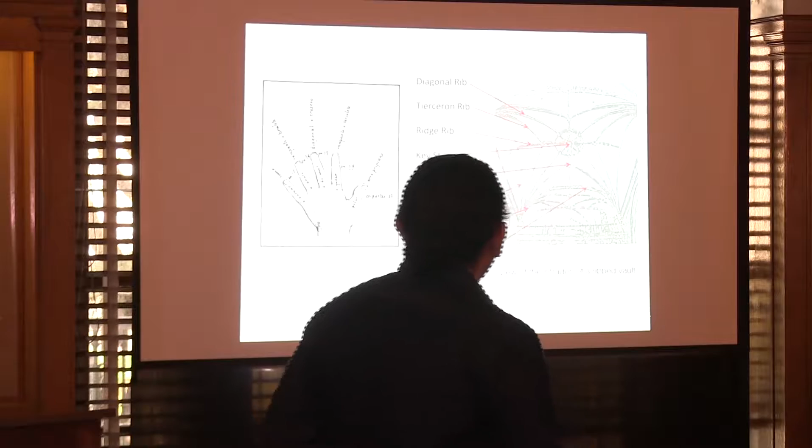Former arches are supported by walls, and transversal arches cross perpendicularly across the nave, similar to what these trusses are doing up here. Then the tas-de-charge is the spring point where all the ribs emerge together.

It's a really beautiful illustration of a hand, showing how each finger belongs to each of these ribs. The perpiaños, or transversal arches, need to be a little thicker because they support a couple of vaults. The middle finger is the diagonal, also a bit thicker. The little finger is the former arch, which doesn't have to be as thick because it's supported by walls—structurally, they each have meaning.

Looking back at 16th century manuscripts, we see that master builders had a method for how they designed these buildings. In this drawing by Hernán Ruiz, a document located at the Polytechnic University of Madrid, we see they had a system to identify the main elements within the rib vaults and then design and build them within those cathedrals or other buildings.

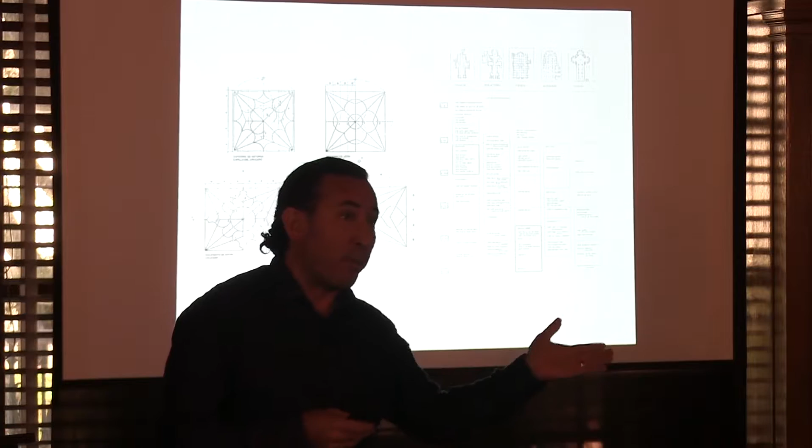More contemporary studies have shown that there are different types of patterns across different structures in Europe, and how they can be identified as different schools of thought, different schools of construction methods. So, based on all this...

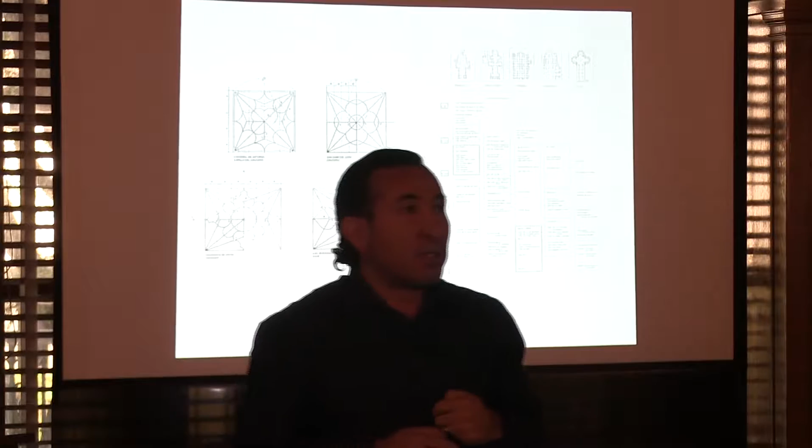...foundational knowledge, we went and did the 3D scanning. The first thing we needed to do was identify the buildings and the elements we wanted to work with in the interior of the churches, and use this scanner shown here.

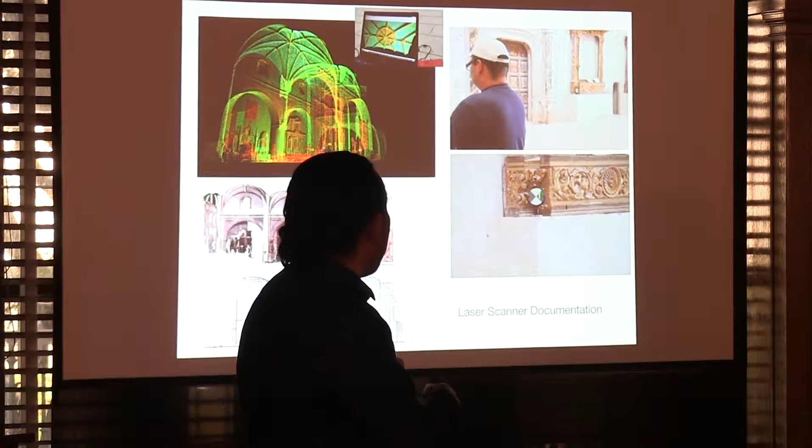You see the scanner laser ray reading the targets over here, and in a couple of days per church, we collected all the information necessary.

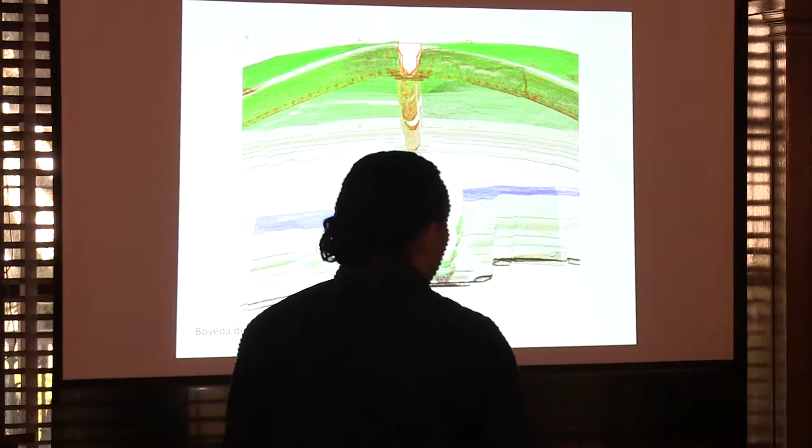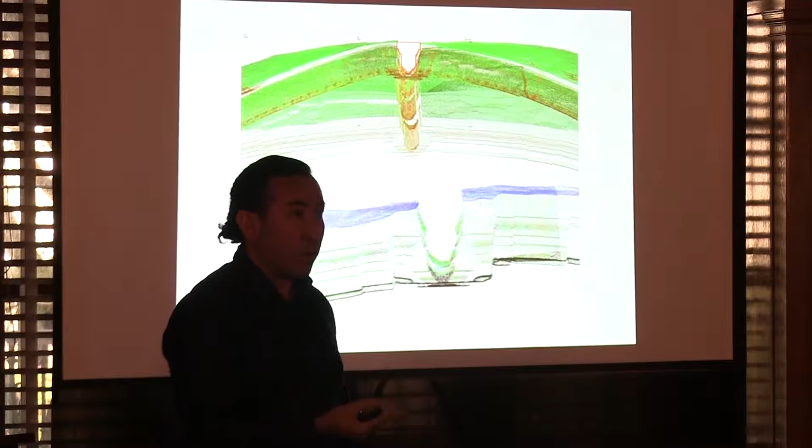And what can we do with that point cloud information? Well, we can do different things—as I mentioned before, you can do visualization, but also cut through the point cloud, zoom in, and reach areas of the building that would otherwise be very difficult to reach without major scaffolding. This gives a graphic type of information useful for analysis.

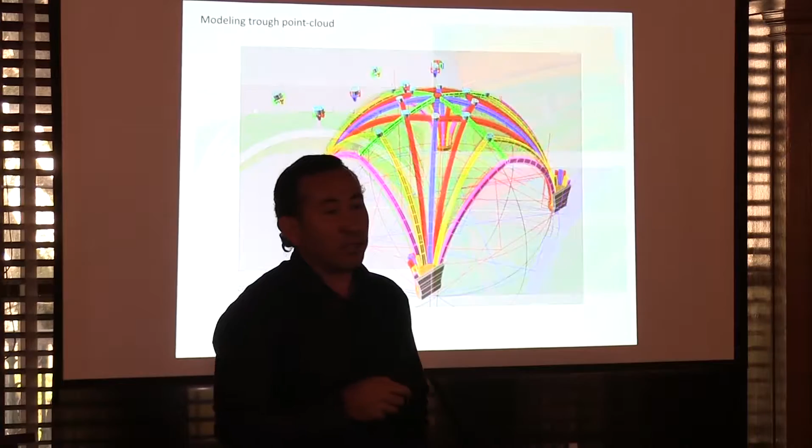So the work that we embraced was on the three-dimensional and two-dimensional features of these point clouds, making sections through them, cutting through them, looking at them from different perspectives, using different types of software, so we could recreate and understand the main design principles and constructive principles that drove these structures. So these are the type of images that we will be looking at.

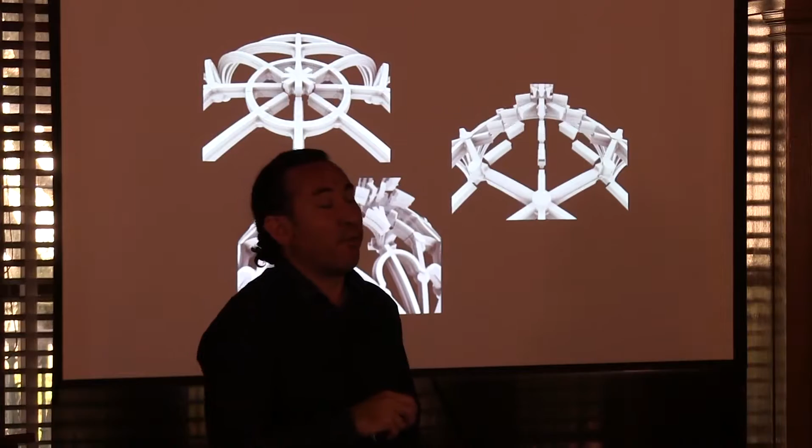We were really aware that what we were dealing with was, and I say we because I've always worked with students on this project, a set of rib vaults following the same building methods as those used in the Gothic period in Europe. It was a technology that was imported or exported from Europe to the Americas, especially to Mexico, and they had to follow specific rules, specific design parameters, specific constraints. So they work structurally, but also they form the space that they are required to form.

So what are those constraints? What are those design rules that were applied here? Within all this process, we used different types of visualization methods. For instance, what we are seeing in this photograph is what is usually called a rendering farm.

It took over the entire computer lab for an entire week during the summer, using the computers at their maximum capacity in order to create short clips so you could see those animations that I just showed you, engaging this process of modeling and visualizing and editing and so forth.

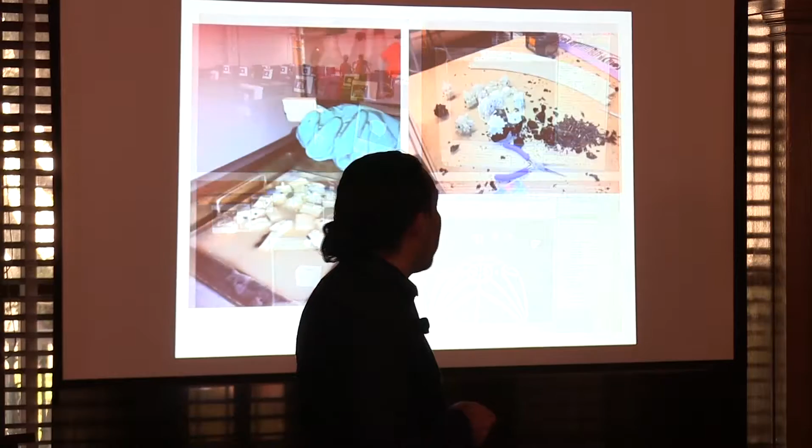Parallel to this process, we also thought, well, why don't we start also using 3D printers? How can 3D printing help us understand these structures better, but also explain them in such a way that people who are not experts can understand the characteristics of the buildings and why they are significant?

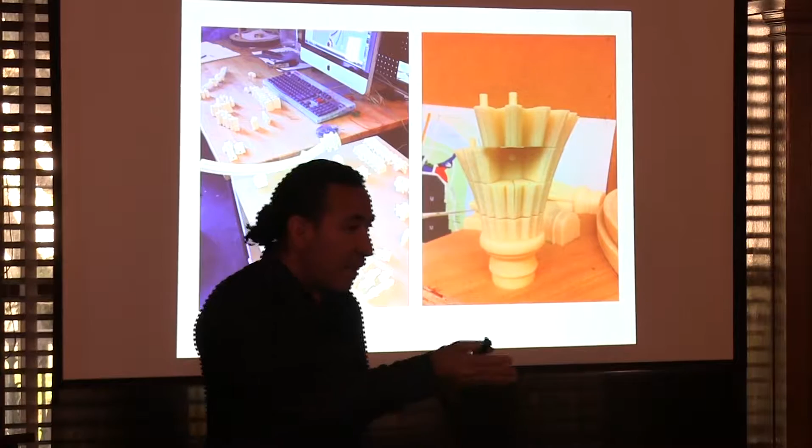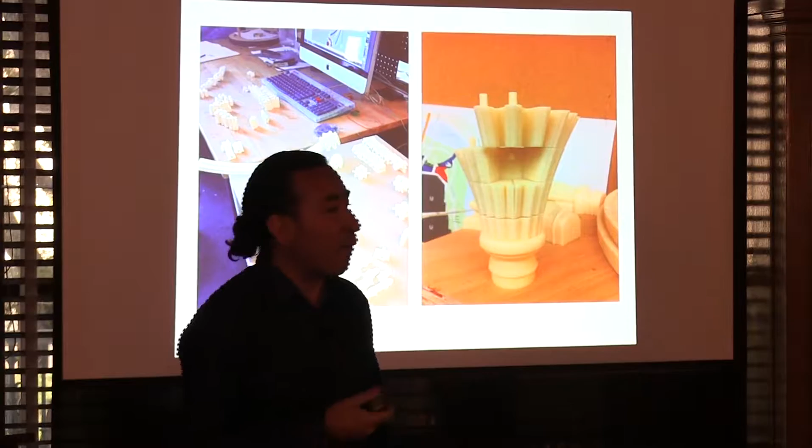The idea is that 3D printing is just like printing a paper, you hit print and the thing comes out, but it's actually a very meticulous, laborious process that involves a lot of work, a lot of trial and error, and then the assembly of these models. These are large models that also require some work.

So those are the different types of work that we embraced, or the goals that we had. I have to confess that making these 3D models with 3D printers wasn't originally the plan. The animations weren't either, but as we were developing the work, we saw the potential of this type of visualization system, and we took advantage of them and developed them.

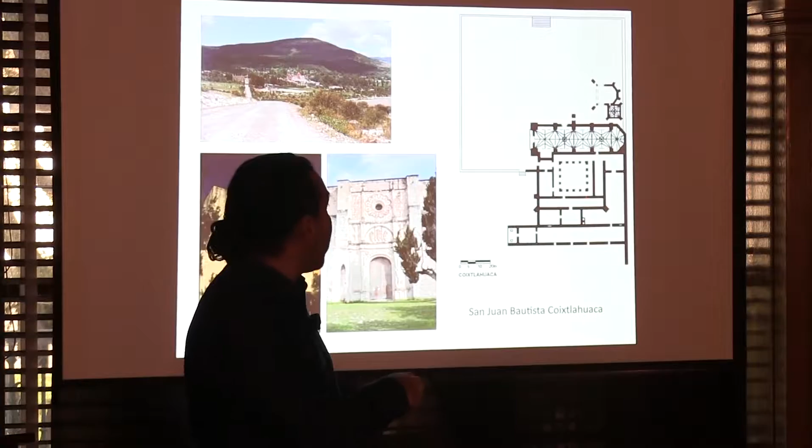In terms of the research findings, looking at the buildings, we find similarities and we find differences. For instance, here in San Juan Bautista, Coixtlahuaca, we see the configuration of the monastery with the large church.

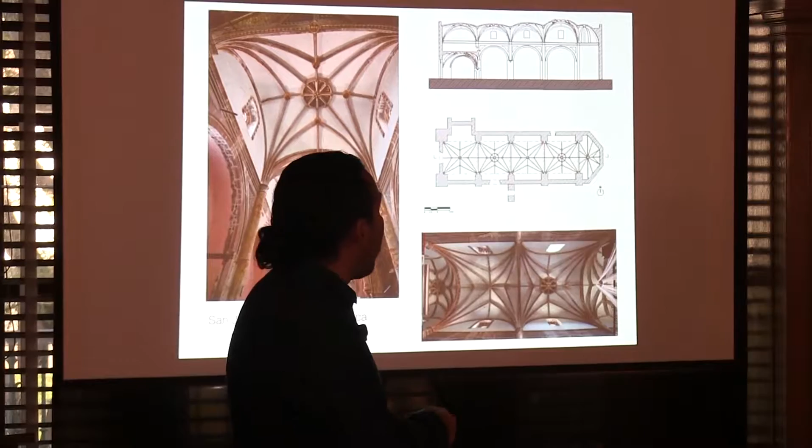This large church, as I mentioned, has excellent ribbed vaults that follow a square plan and so forth. But what matters here, and this is the type of discussion that specialists engage in, is: okay, how were they designed? And what we learned here is that by looking at the point cloud, having a very clear orthographic projection, seeing them purely in plan, we can recreate what were the geometric steps or constructions necessary to identify the layout of the ribs in plan.

For instance, here we see that the very first step, after drawing the diagonals and the ridge ribs, was to draw a triangle within that square, and that defines the path of those tierceron ribs. This operation is repeated four times, one per side of the square.

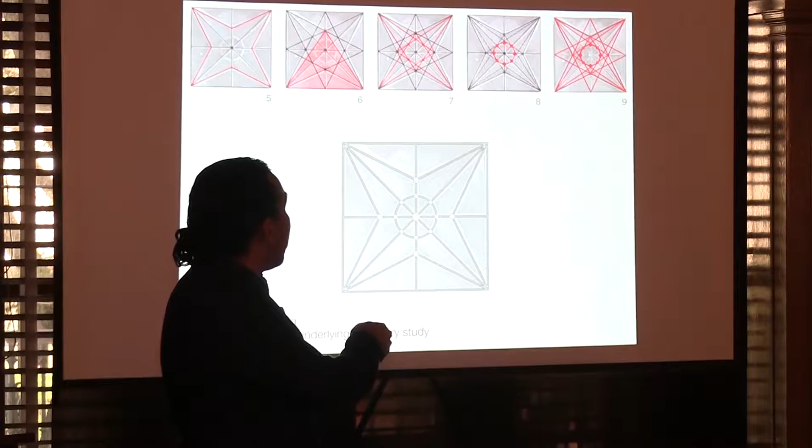And then the last question remaining is: where do we find the diameter, the center, the radius for this circle right at the center? So the next step will be to draw another triangle connecting the boss that connects the two tiercerons, and using one of the sides of the square as a base, and that will identify the point where you can see the radius of this internal circle, therefore having the entire drawing of the vault completed.

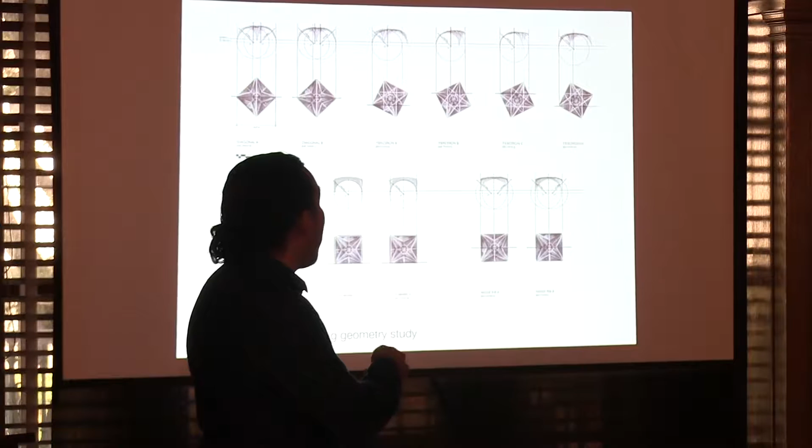This needs to be translated into the three-dimensional spectrum, it needs to be translated into elevation. Then, learning from cutting through this point cloud, we could recreate and figure out the radii that were used for each one of the arches, and come to interesting conclusions.

For instance, in this case, the vault -- there are two schools of thought. One of them is that the vault is a preconceived shape that the master builder tries to achieve. First, he says, okay, this is my shape.

At this period of time it would usually be a sphere, and you'd figure out how to draw all these ribs to achieve this spherical surface in space, forming the vault. The other approach, which is more ancient and comes from the Gothic period, says we are going to draw every single rib individually, and the overall shape of the vault is just a consequence. The overall geometry is pretty much a result of how each one of those ribs was drawn.

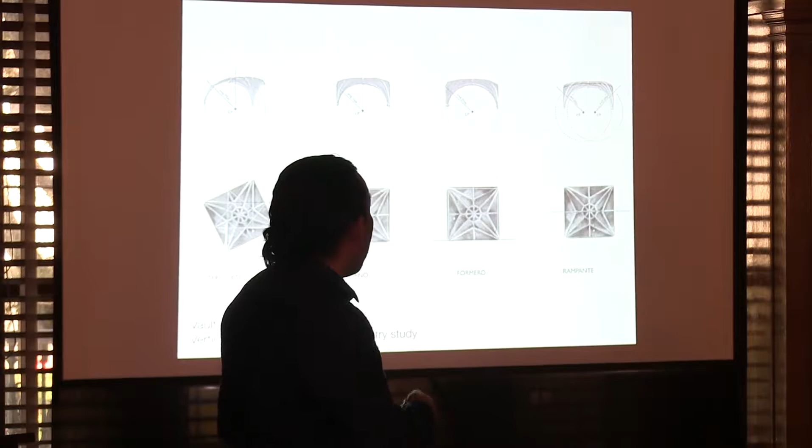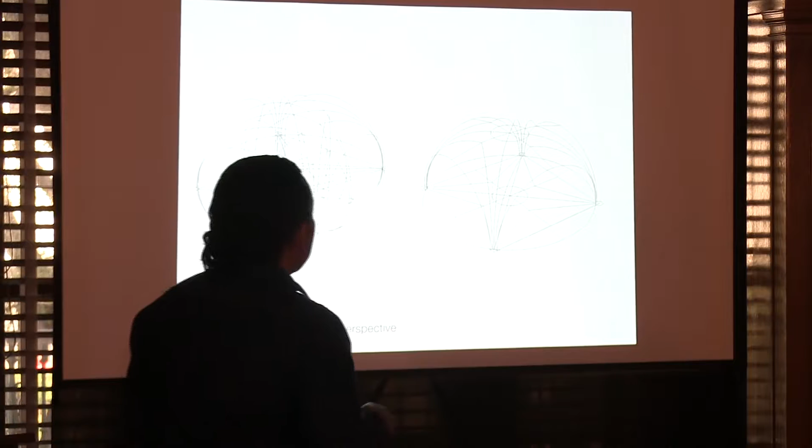Turns out that this vault follows this Gothic mode of thinking. Each one of these ribs does not respond to an overall geometry, but to a very individual set of operations that, at the end, form this vault with a very flat center within that configuration. So these are other types of visualization where we see the point cloud compared with these lines.

This is in figuring out if the actual hypothesis of these principles of design is correct. And then all of those are pretty much tested, being able to actually reproduce what we would call orthographic projections, understand how this was actually built in space, and be able to visualize this vault from the constructive perspective.

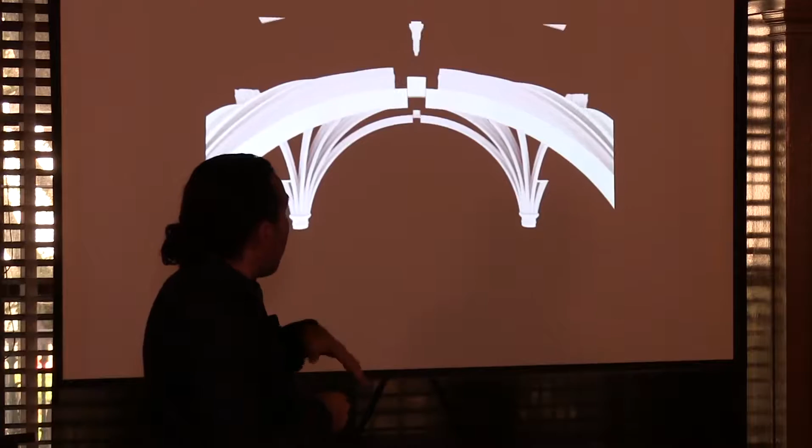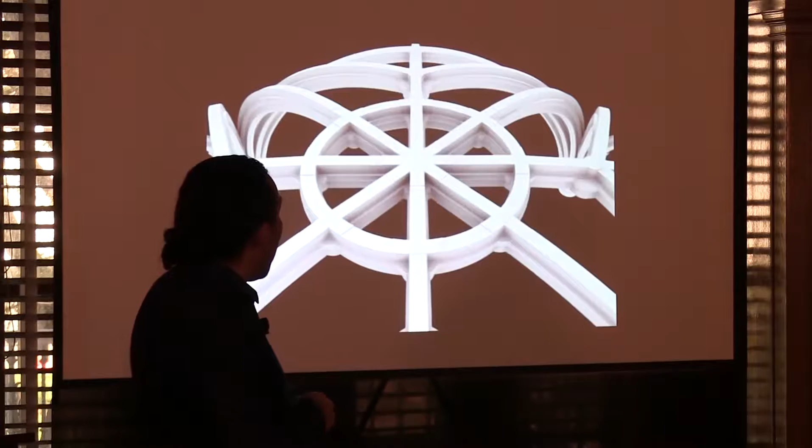So we are seeing how individual pieces form these arches, and how these arches form the vault itself, and how, as I mentioned, you are going to see the pieces right at the center forming a pretty much horizontal ring. And then the keystone comes in, and we understand also the stability principles of force for this type of structure.

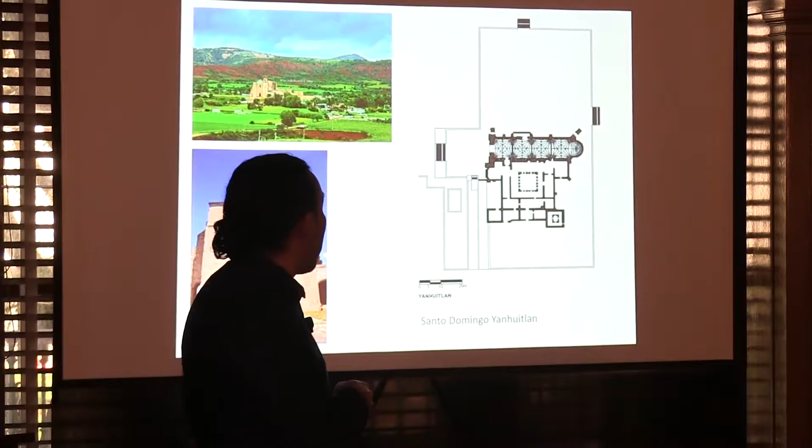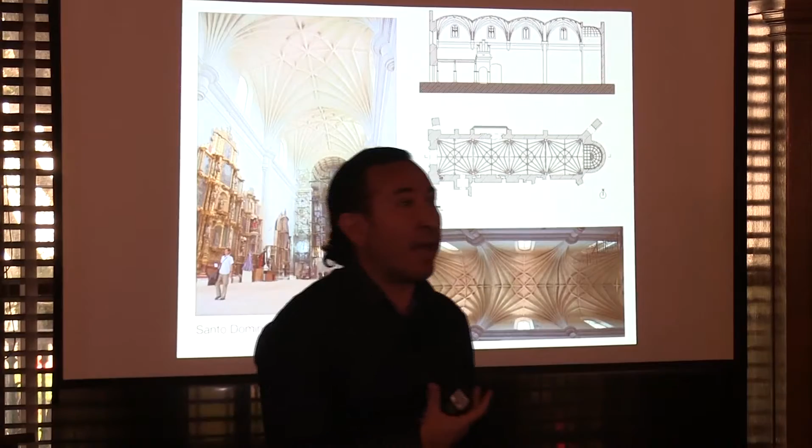The second one is Yanhuitlan, the Church of Yanhuitlan, the tallest building, 16th century, with really tall vaults. We see that again, four vaults on a square plan that follow exactly the same design. So taking one as the model, we start to understand how they were designed in plan, starting with an equilateral triangle.

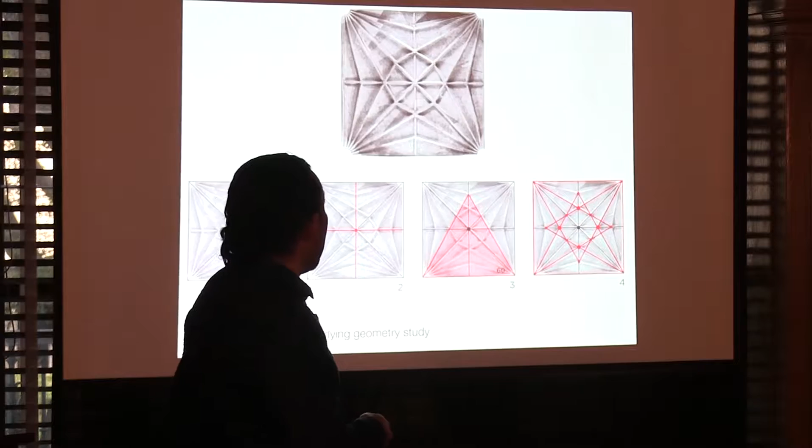Something that identifies this vault, unique to this set of vaults, is that they have two tiercerons. So they have the diagonal ribs, but also two tiercerons, which is not common, especially comparing this type of vault with other vaults of similar span and square plan shape. Nevertheless, the designer decided to use double tiercerons, so the task is to identify where those initial operations in plan were performed, how they were done, and the sequence of steps the designer had to follow to give form in plan to this vault.

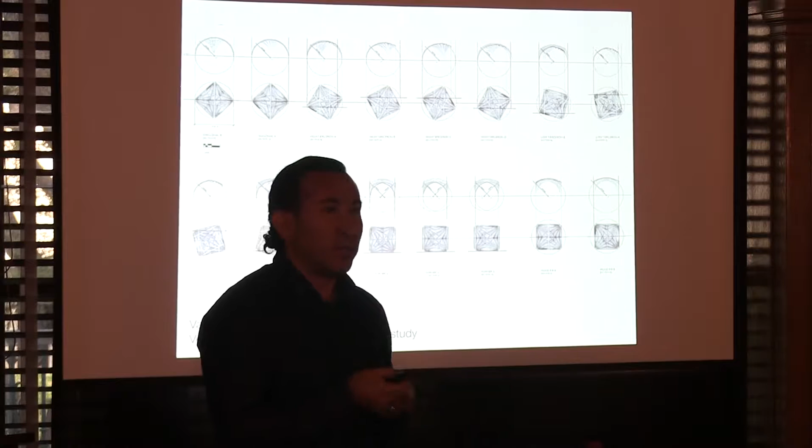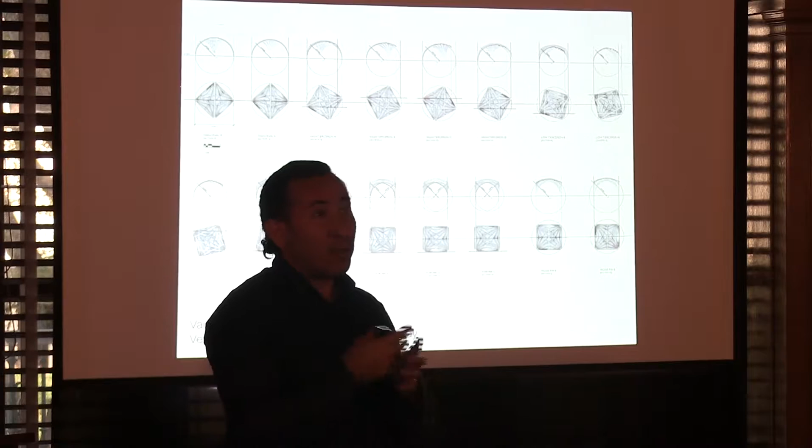The second one will be very similar, using the point cloud, starting by looking at each one of those arches. They have distortions and deformations. What we are facing right now in class—I teach a class on building documentation—is this contrast between what was made, which is very handcrafted. It's actually indigenous people who had never built this before, crafting these vaults, so of course they are not perfect.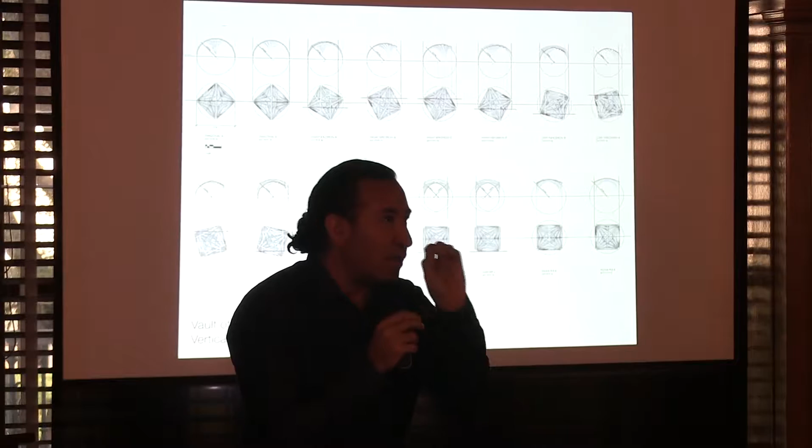And then using digital tools that require this excessive amount of precision—everything to the millimeter, to the 32nd of an inch—we try to negotiate with these tolerances, with these imperfections, if you want to call them that. So there is some sense of how these were designed.

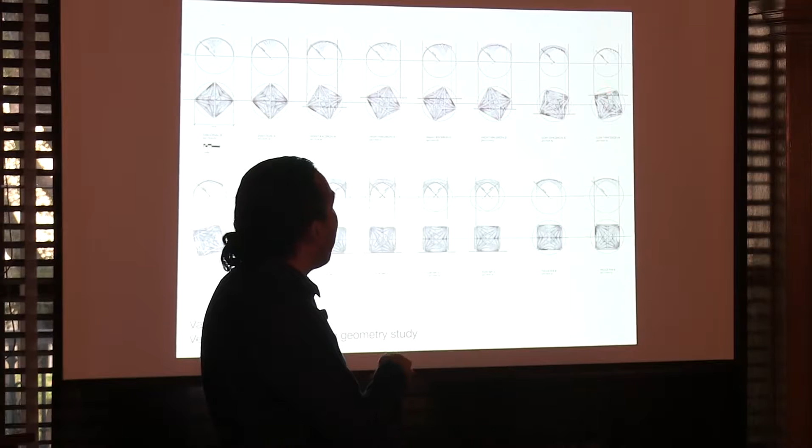So what you see here is just a series of drawings that project the point cloud in plan and in section, seeing them vertically and horizontally, in order to identify the radii that govern all the arches within the vault. What is interesting about this vault is that the master builder had a Renaissance background, meaning what he was thinking was to form a spherical surface, and all the arches that form the ribs of the vault are designed so that what we see up there is a segment of a sphere.

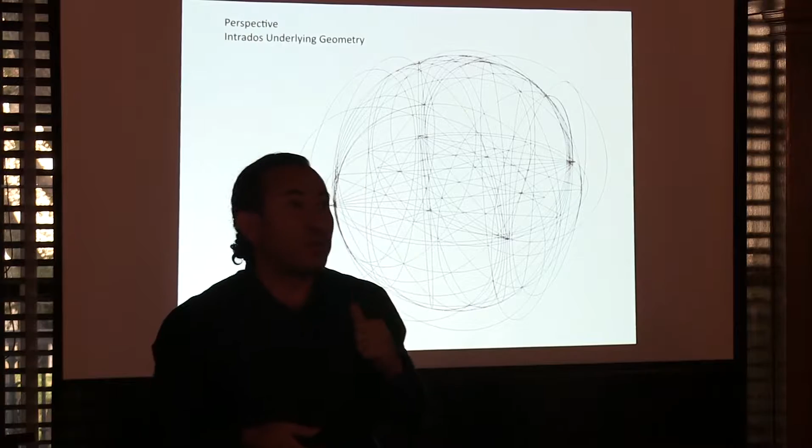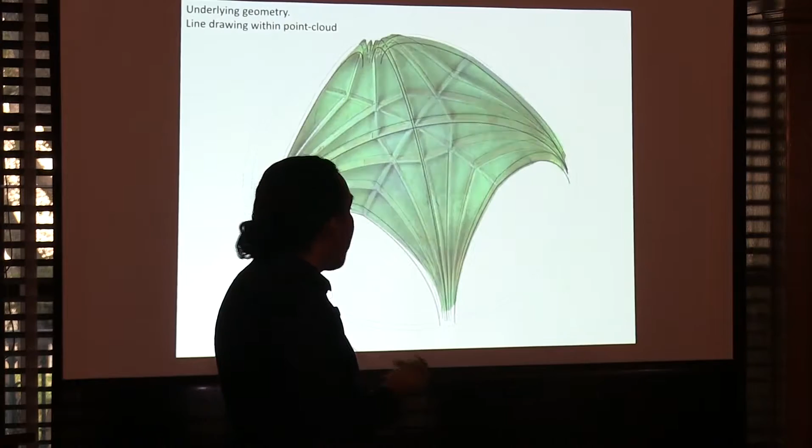So it's the opposite of the previous vault, which was a result of individual operations. This one is a preconceived vault, and the master builder does whatever is necessary to achieve that form. So it's the same process of verifying and understanding, and then seeing, through this process, how this vault performs. And this is not the vault that is supposed to be there.

And then finally, the open chapel of Teposcolula, which is a unique building in many respects. First of all, because open chapels were usually built for temporary purposes—it's while indigenous people accept to walk into the churches.

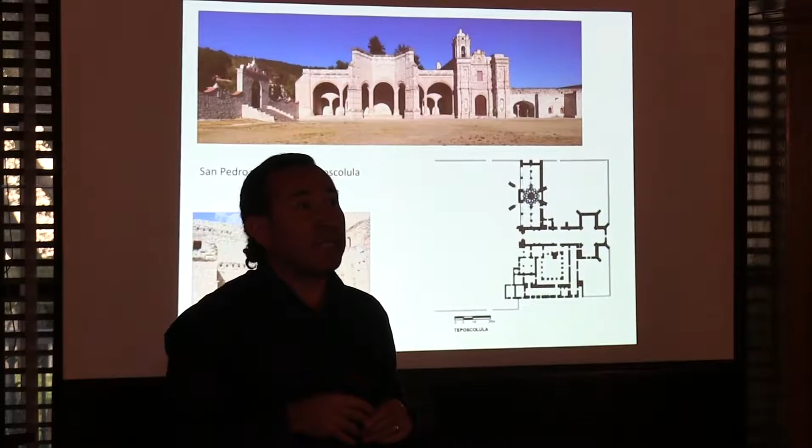It's while the indigenous people transformed into the Catholic religion. It's while we built the actual church many times.

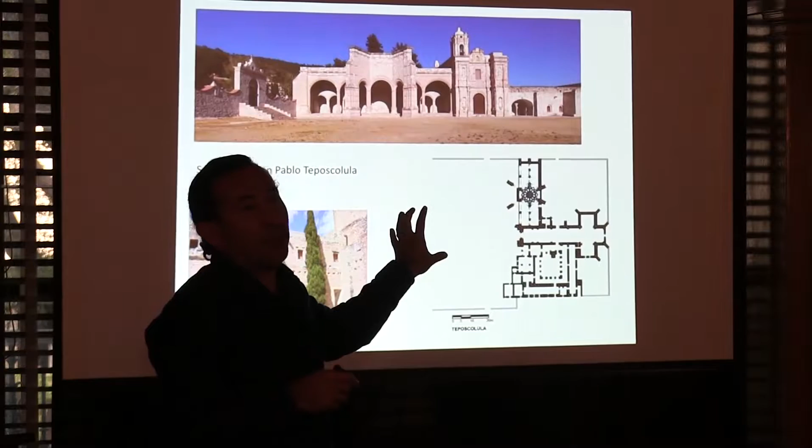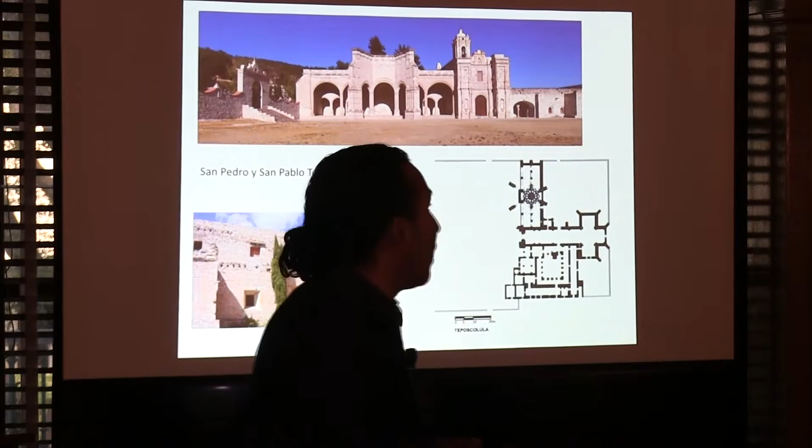But in this case, the open chapel is built specifically to be an open chapel, to stay as an open chapel, and to be a monument for the town. So this is the building itself. Look at the church, right? The church is really modest if we actually compare it with the presence that the open chapel has.

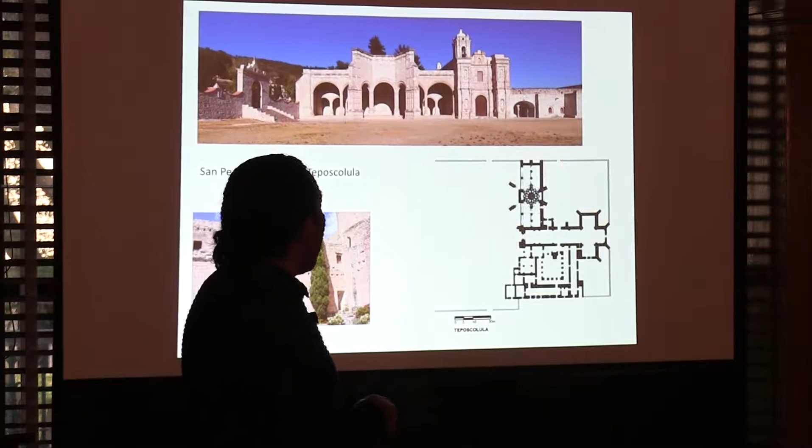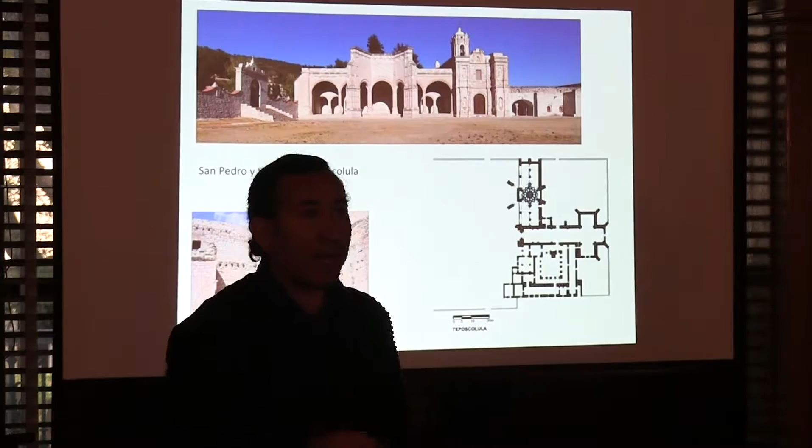This is a monumental building. It's really tall. In fact, a person will be about this tall over here, right? It's almost difficult to show. The idea is that the altar will be here, the priest will be here celebrating the ceremony, and the indigenous people will be here attending the ceremony.

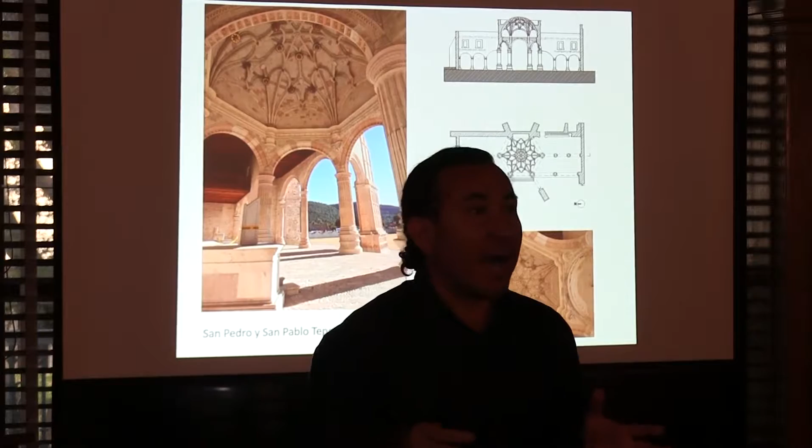But also it's very unique because the vault, right, that was what has been surprising for many of my colleagues around the world, is that it's actually based on a hexagonal plan. There are no many precedents of a vault of this nature built into a hexagonal plan. So that pretty much determines many of the aspects that show the way in which this was designed.

So based on this hexagon, there is a series of operations based on the triangles that happen within the hexagon, that start to identify the path and the geometry for each one of the ribs. We see that this vault also has a series of ribs called warped ribs, because they have, we'll say, double curvature - not only the curvature of the surface of the arch itself, but also traveling within that surface, and therefore have this double curvature.

Each one of these steps is going to be used to identify where those warped ribs will take place. Then a series of operations, similarly to those we did before, in order to understand how those arches were actually built. In this case, understanding that because of the hexagonal nature of this plan, the consequence of the arches form what we call a dome, which is pretty much like half of a sphere, half of an orange, that has been sectioned by these hexagon sides.

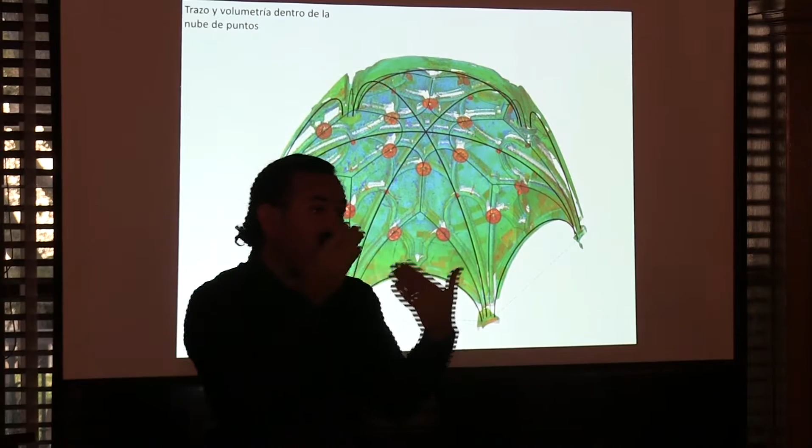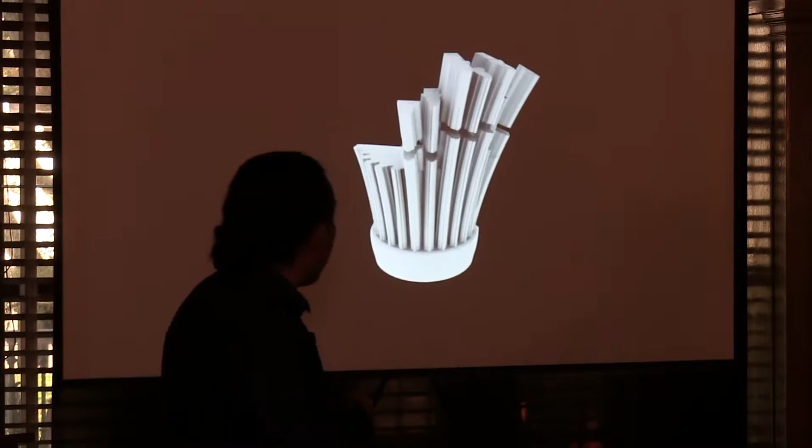Working through the process of understanding if those calculations and hypotheses, based on the average of the information we obtain from the point cloud, are somehow precise, and then moving into a much more detailed set of operations. This is the vault of Yanhuitlán, but the idea is that all these vaults are governed by this notion of making smaller pieces that have to have the very precise shape to fit within the arches, but also to be structurally stable.

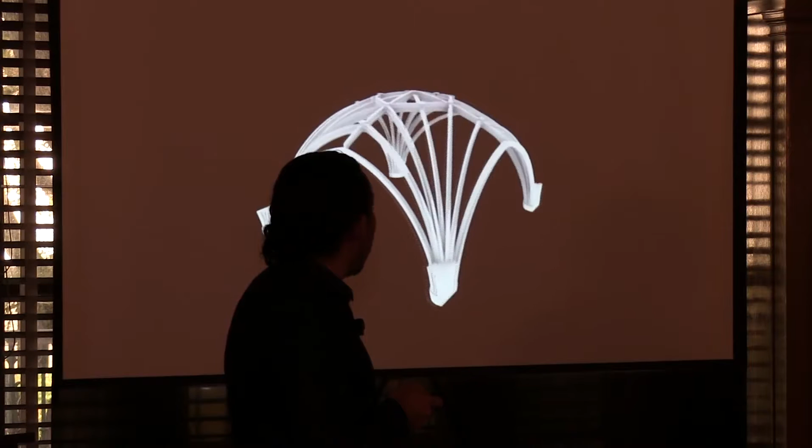So think about this as a three-dimensional puzzle that is about 50,000 kilograms, about 50 tons, all made with stone.

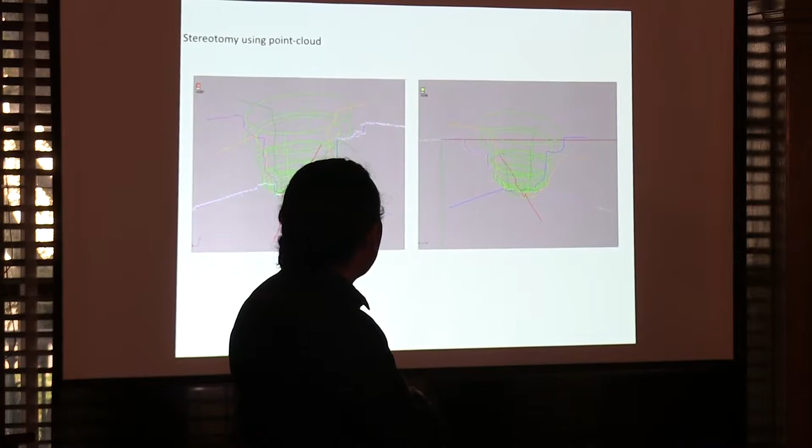And then, well, identifying the overall geometry pretty much brings the second layer of the questions, which is how each one of those pieces were cut. So following a similar procedure, what we see here on green is the point cloud. You can barely distinguish it on the screen right now, but there are some lines of different color, and what those lines represent are sections through each one of those pieces, which will help us identify the profiling of the pieces themselves, and then start to reconstruct them and understand what the actual solutions were.

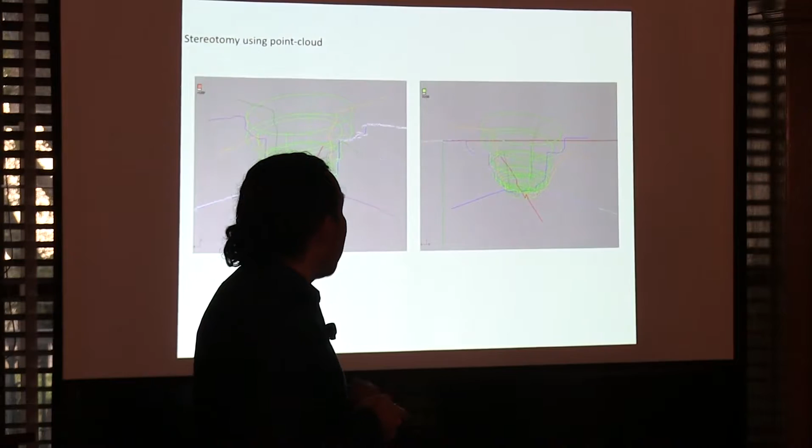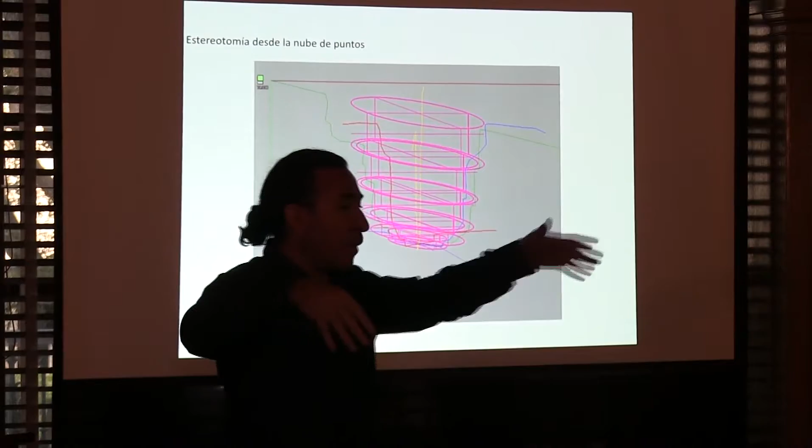These are pieces that are, I would say, almost like sculptures - they are really, really large. When we visit a church, we look up there and they look so small, but in fact a stone from the quarry would have to be about 4 feet by 4 feet by 4 feet, or 5 by 5 by 5. There are large pieces of stone that have been carved out in order to form these connections, where the ribs converge.

And each one of those solutions is important to recognize, because what we can learn is, one, what school of thought they belong to; second, how they used to solve this type of architectural and constructive problems; and third, also to see if there is any influence of the indigenous people in the manufacture of this type of pieces.

And then using the visualization that this three-dimensional modeling offers, in order to explain in a little more detail how each one of those pieces were carved - what are the procedures that a master mason, who is chiseling the stone, needs to follow in order to create these nodes where all these different ribs converge.

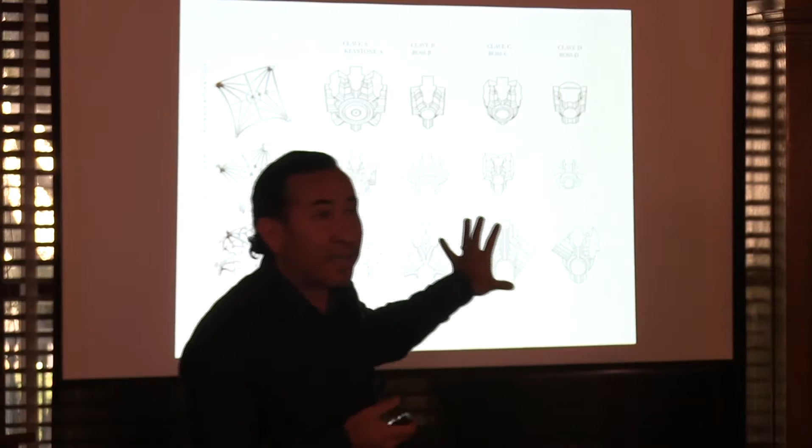What I find compelling about this type of representation is that it's interesting not only for the specialist, but also for other types of public who are not experts but can understand how this is actually built. They have different shapes, and the process is quite interesting. At the end, we have a catalog of pieces for each one of the vaults.

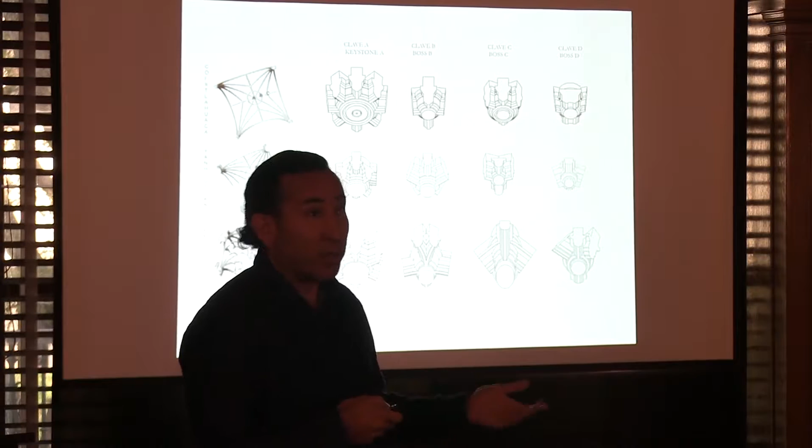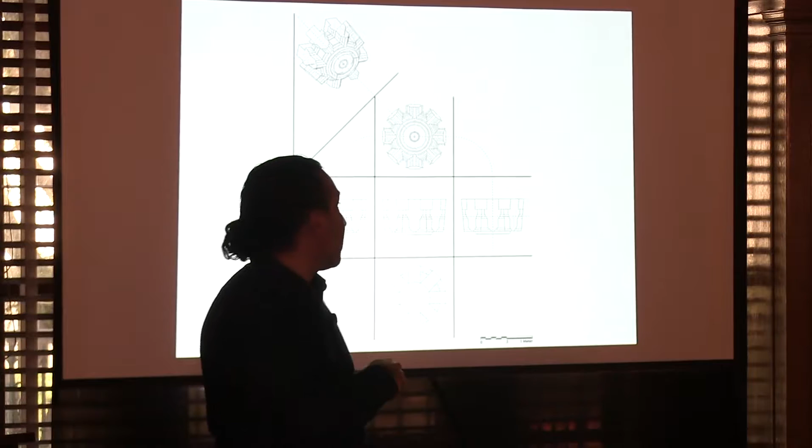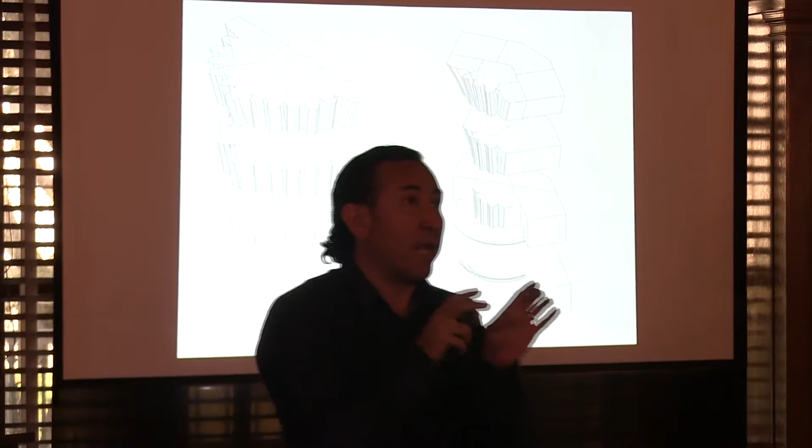We compare sizes, compare methods, compare solutions, and then translate those into more traditional methods of depiction, such as orthographic projections, which have been used since the 18th century with descriptive geometry. Visualizing the different pieces, like the tas-de-charge, thinking about how they are carved and how they come together, all the crucial elements that form the structure.

So there are several conclusions that can be drawn from this work. Perhaps the most important is that if we look at historic documents, we find almost no information about who built or designed these buildings, where they came from, etc. That information is non-existent, it's lost. It's early 16th century, so very little information was being compiled at the time.

There have been several speculations about these buildings by architectural historians who have said that because they are so close together and use rib vaults, they were designed by the same architect or master builder, who very likely was a friar, a priest from the Dominican order, which led the efforts to construct these buildings at that time.

But when we start looking at the buildings with much more precision, we see that in fact there is no possibility that only one designer and one master builder coordinated the efforts for the three churches. There were three different master builders within them, so the differences are substantial. Who were they? We don't know exactly, but we know at least that they come from different schools of thought.

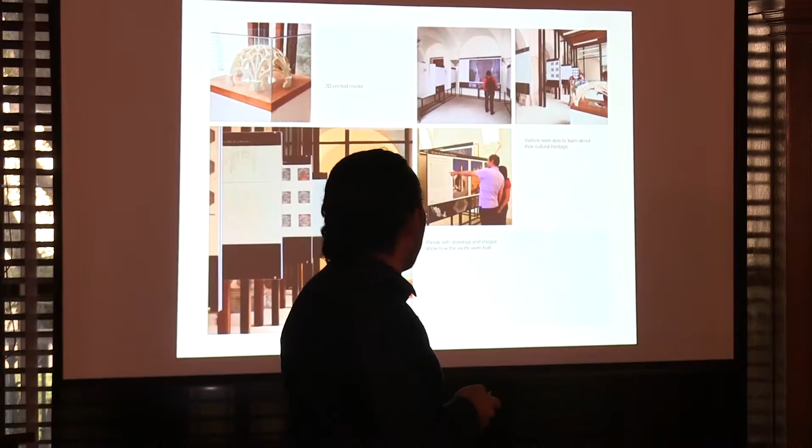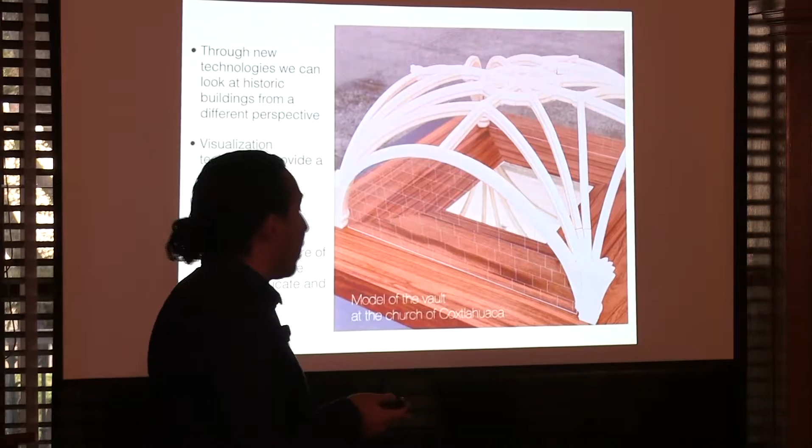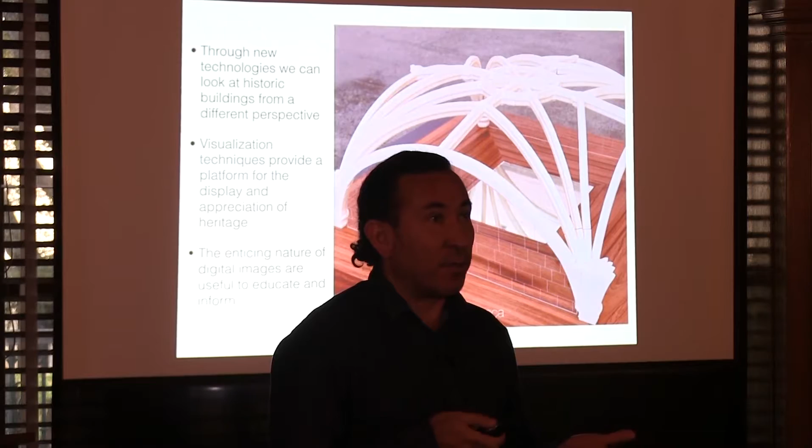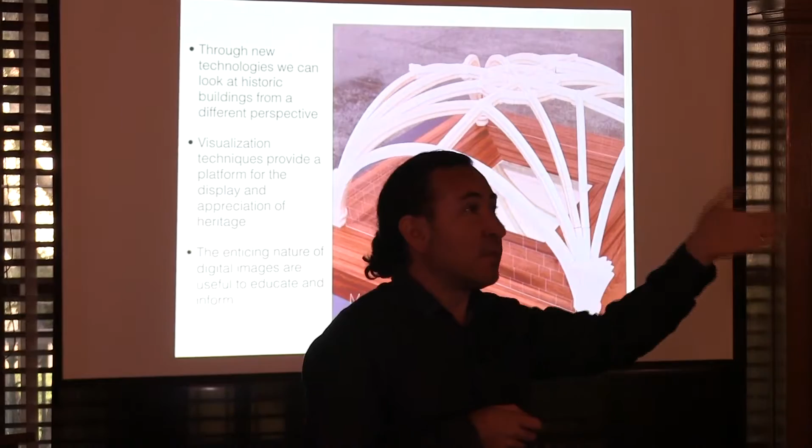So just to wrap it up, I think I'm going to state the obvious, but what we see is that digital technologies can help us look at historic buildings from a different perspective. The visualization techniques can be a platform to explain structures of this nature and appreciate their significance. Through the exhibition, I saw a lot of people saying, look, this is the church where my father was born. I didn't know it was that important or built this way.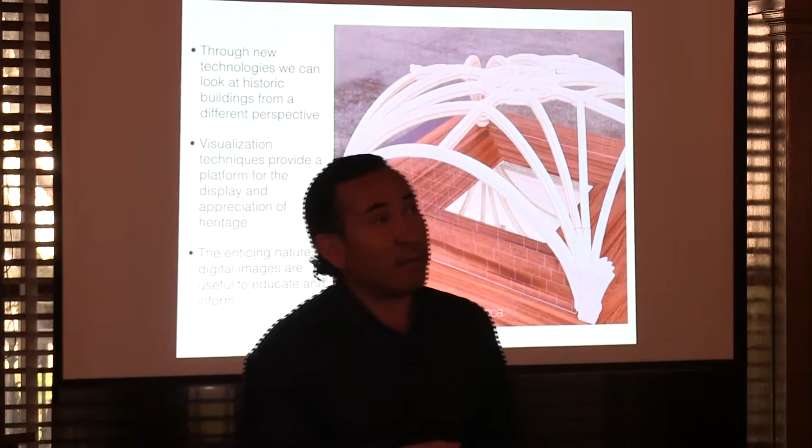The enticing nature of this imagery created by these methods of visualization can help to educate others. I have seen how younger generations identify with the work because it's similar to what they are working with nowadays on their computers, on their own work, but reflected on historic buildings.

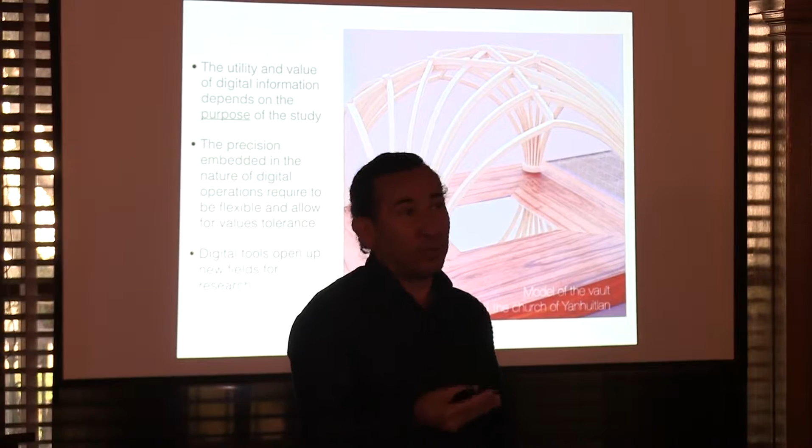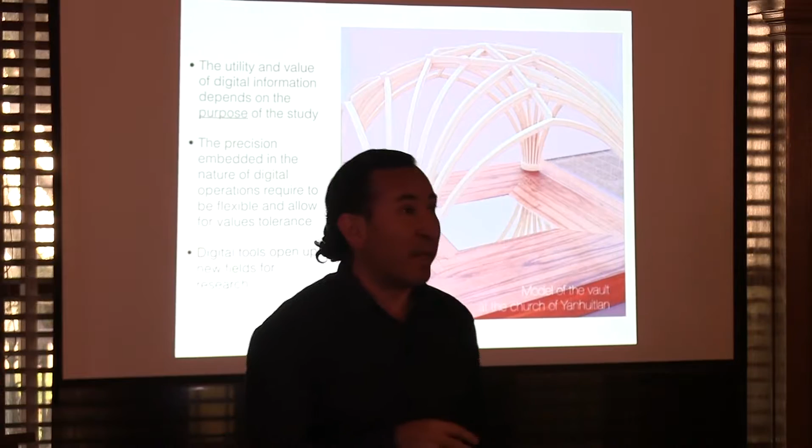It's important to identify what the purpose of using these technologies is. I have seen a number of times the use, I will say abuse, of laser scanning and digital animations that help to understand the buildings from a very unique perspective, but they don't go any further than that animation.

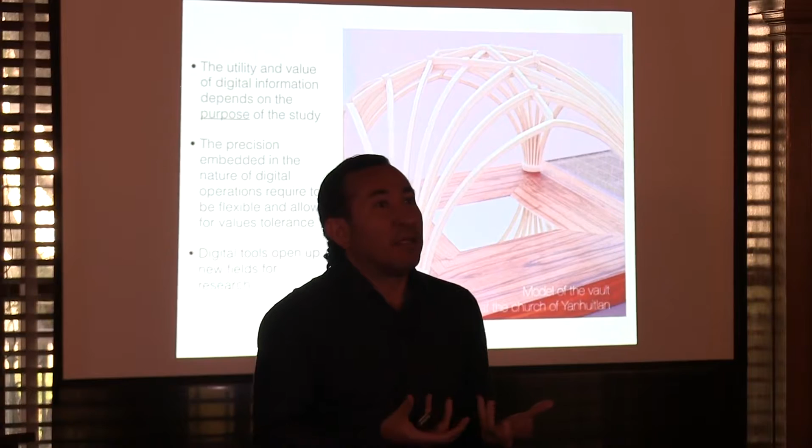I believe it's important to ask, why is it that we want this information? How are we going to use it? And what is the final purpose of that?

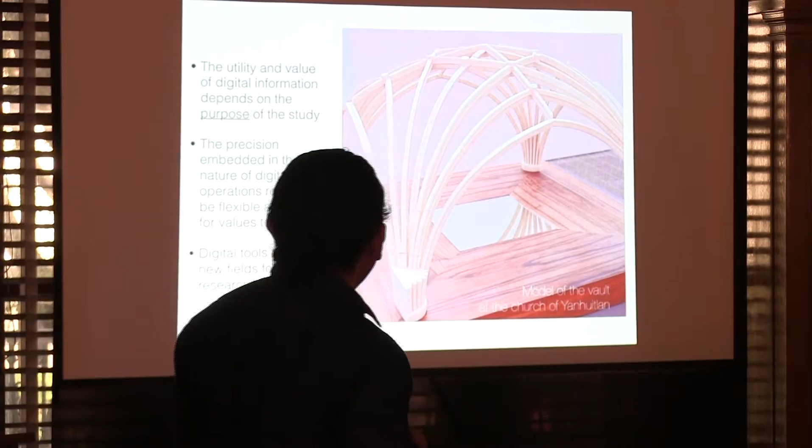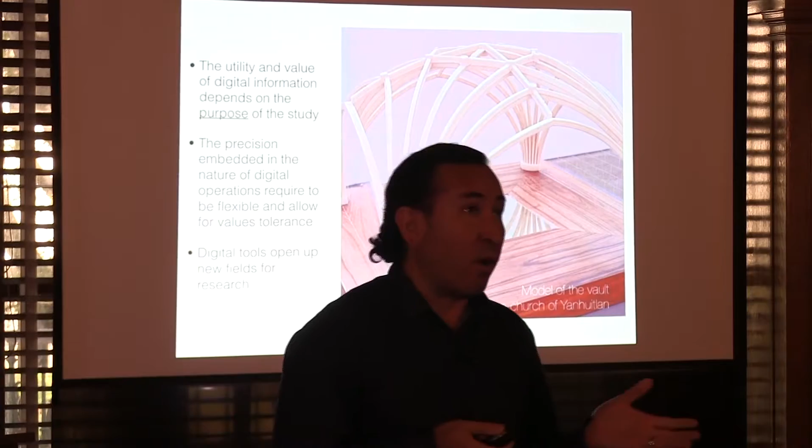I was talking about the precision versus the handcraft nature of the structures, being able to negotiate those is important. And they will open new fields of research, looking at the buildings from different perspectives.

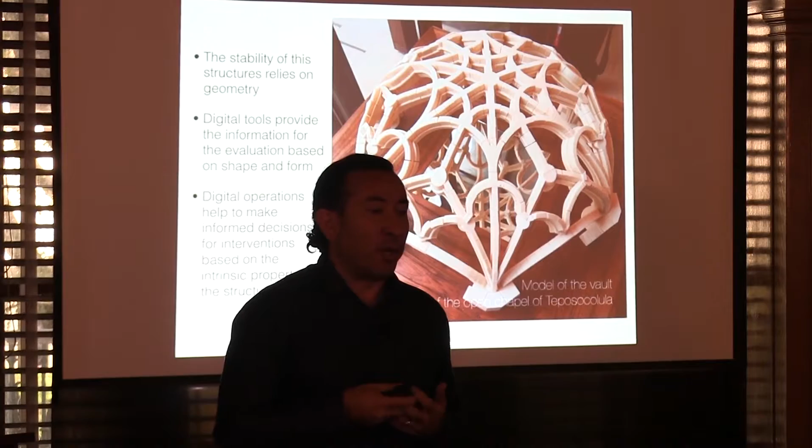They can help to better understand the stability of historic buildings, to evaluate the state of conservation, and therefore achieve a much more precise intervention strategy that will be more compatible with the building, and will help preserve its integrity, especially when they need some type of intervention.

As I mentioned, there is a publication that came out from the National University of Mexico, and it has won a couple of awards already. There is also a website, www.mixtecstonecutting.com, where you can find all these animations and a bit more information obtained through this project. With that, I finish the presentation.

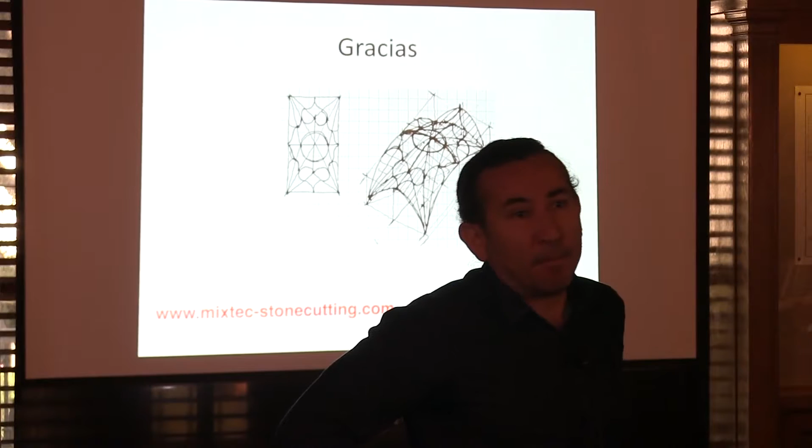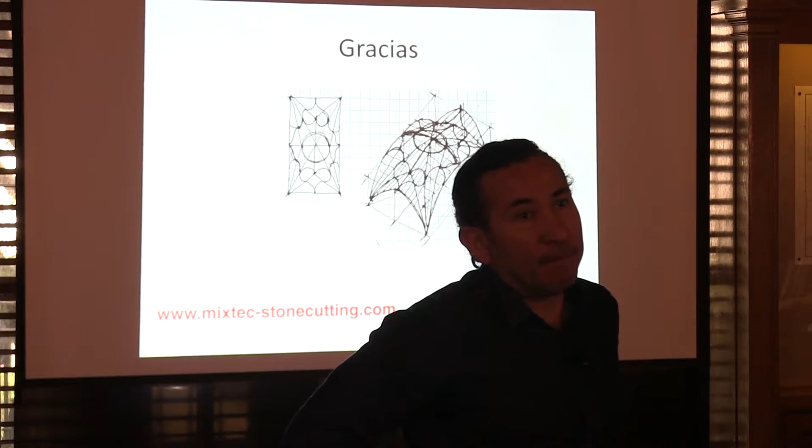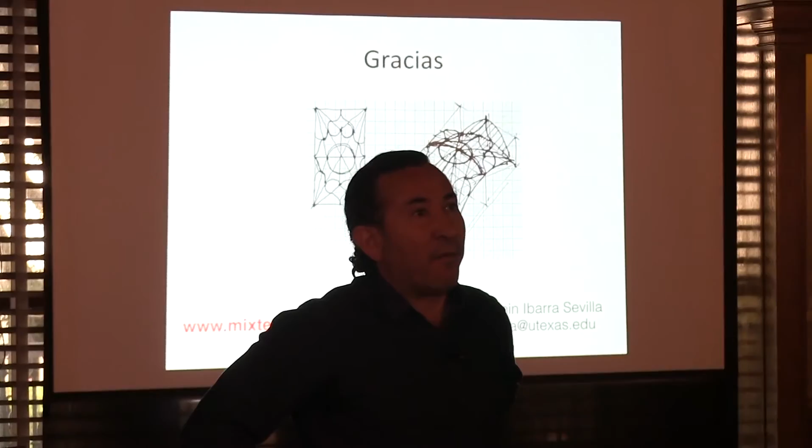Structural advantages would be that it was common practice to have what is called a compression ring. Those circles closer to the keystone help to alleviate the stress that a keystone receives, because they are collecting some of the forces before the keystone has to. So it's reinforcement, but it's also a way of decorating the vaults with a structural component.

For instance, what I was talking about—the finding is, okay, there is no way these were designed by the same architect. But then the question is, who were these people?

Another type of question I can imagine emerging from this technology is how, now that we work with parametric design or parametric tools, if there is a set of parameters or patterns that govern the design of these structures, is there a possibility to recreate those through purely computing effort? And what would be the variables, or how could we do this reverse engineering through the exercise of feeding parameters or equations to computers, and what would they produce?

Also, what I was trying to do—there are some nuances in some of the vaults that are very difficult to discern from this very straightforward perspective. They will need a little further study.